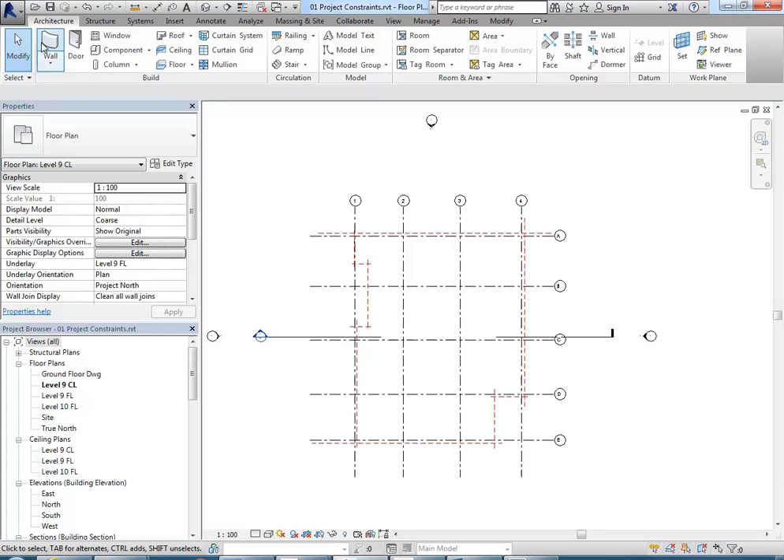So I've got my basic layout here, and now I want to start putting in some of the main elements. For Revit, these are the things that are system families. If you don't know what a system family is, don't worry too much—just think of them as walls, floors, ceilings and roofs. There are a few others, but those are the main ones. You should think of those differently to things like doors, windows, and columns, which you'll add afterwards.

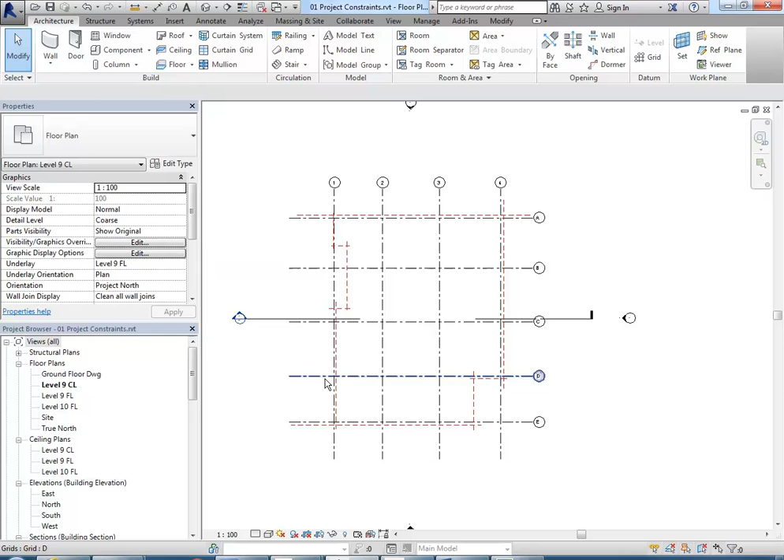This is a pretty standard process you want to go through with Revit, just establishing these main constraints before you then go ahead and add in the detail.

Notice that my copied view didn't change name. The others were linked, so they've all changed automatically. But this one hasn't changed, so I'm going to right click and go to rename to give it a new name.

I'm going to add something extra—I'm going to put a number in front, just to get you thinking about how these views get managed. So I'm going to call it 01 level 9 DWG, that'll do.

Notice how my level 9 CL has gone in before level 9 FL. That's because it just puts them in alphabetical order. There are ways of sorting your views by height, but I don't want to show you that now. A simple way of organising them by height is just to give them names that put them in that order alphabetically. So I'm going to rename this one and put 02 level 9 CL in front of it.

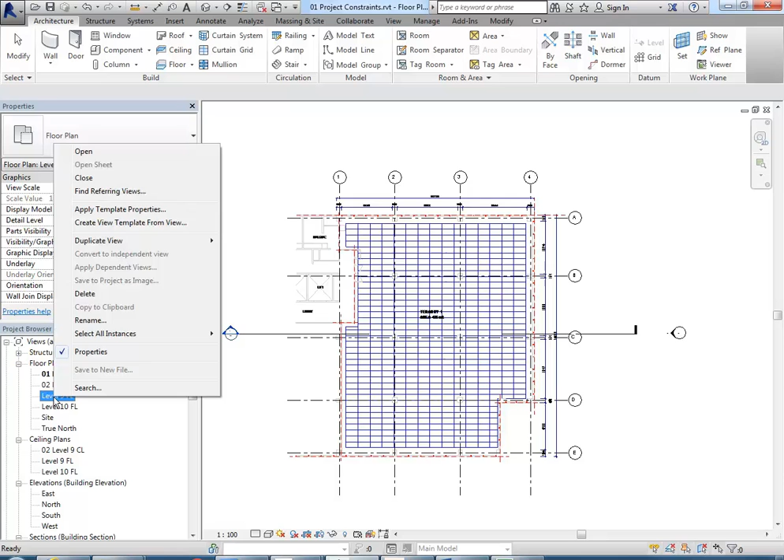So I want that to be second—yes to rename. Level 9 FL, I'm going to rename and put 01, so now yes to rename, and that goes before level 9 CL. Level 10 FL, I may as well rename at the same time and make that 03.

So you just want to keep organising these as you work through your projects, just to make things easy for yourself.

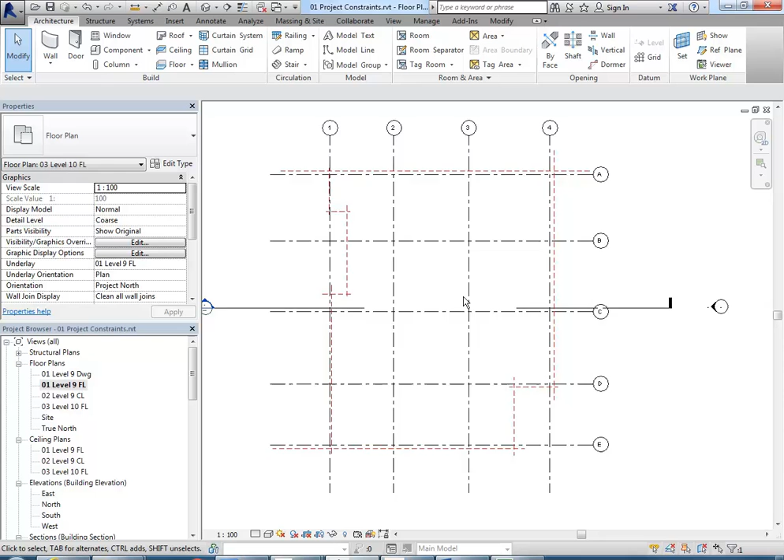So going to the one that has the drawing, let's zoom in and have a bit of a look at the wall layout that we have there. And then you can see, again, the columns.

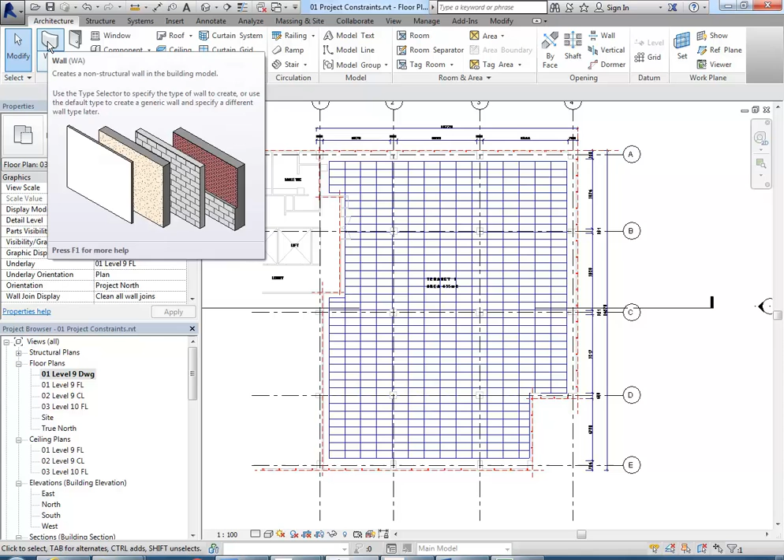Now, I was saying you should do the system family first, so that's your walls in most cases. But these are curtain walls, so the structure really is going to be defined by the columns. So I'm going to put the columns in first, and then do my walls afterwards, and then the floors after that.

So I'm going to start placing columns, but I want to measure, just using the measuring tool, and see what these are. I'd say the person who drew this wasn't being too fussy with the measurements.

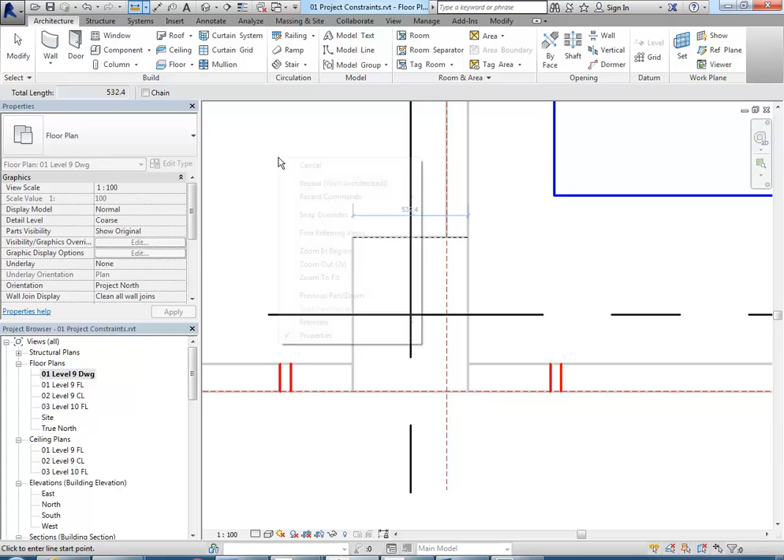723 by 532. Let's make it 730 by 530. Even that's not the greatest, but we'll live with it.

Okay, so I want to get a column in that's going to be that size. Anyone use the column tool up until now? No, you haven't. Okay, so which of those would you think you'd be using based on what we've done so far?

Oh, that's a good guess, actually. I thought you might say architectural, because for walls you've been using architectural, and for floors you've been using architectural. But you're right—for this, columns, don't use architectural. Use structural where you can, it's usually better.

Okay, now when you go to place columns, you'll see that there'll probably only be one loaded at first in your properties panel. You can see there we've got a UC, universal column, with a size we don't really need to worry about because I'm going to load in a new one.

So just like a door or window, you can go to load family on the ribbon there. And then don't go to columns—that's a common mistake people make. You need to go to structural columns. Columns won't work here, it has to be structural columns. And then concrete, and then concrete rectangular column.

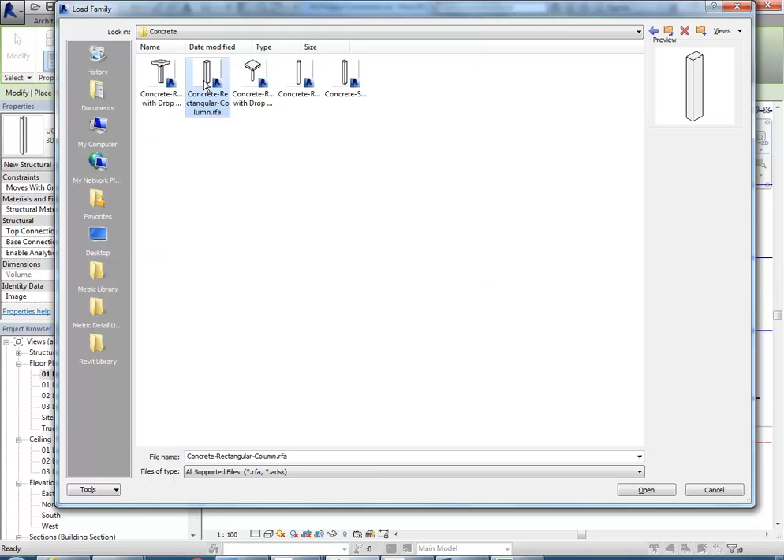Now it should come up with a list of sizes if we're lucky, otherwise it'll just load it straight in. No, it didn't give us a choice, that's okay. So you can see there, I can click on the properties panel and see a list of sizes, and none of those are right anyway, so we're going to make our own size.

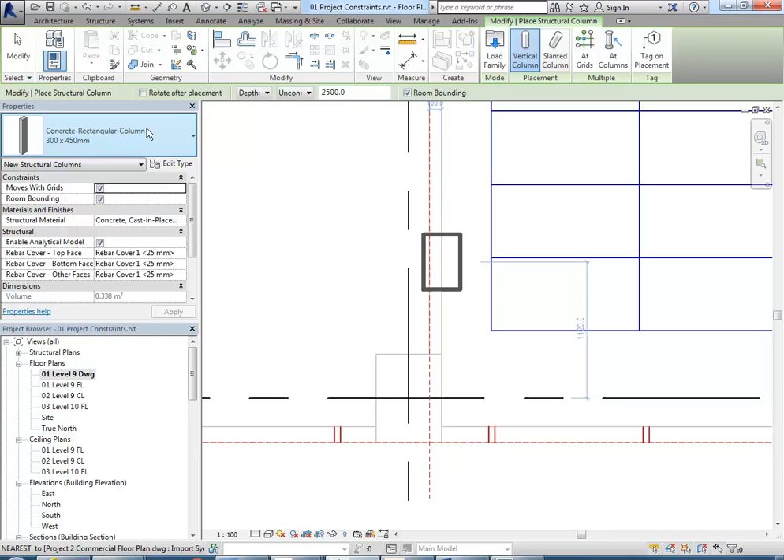So do you remember the dimension I gave you? 730 by 530, wasn't it? I think it was, but we can check that in a moment.

So I'm going to go to Edit Type, Duplicate, and type in the size we want. I'm going to put the smaller one first, 530 by 730 mm, and then change these B and H dimensions to those sizes.

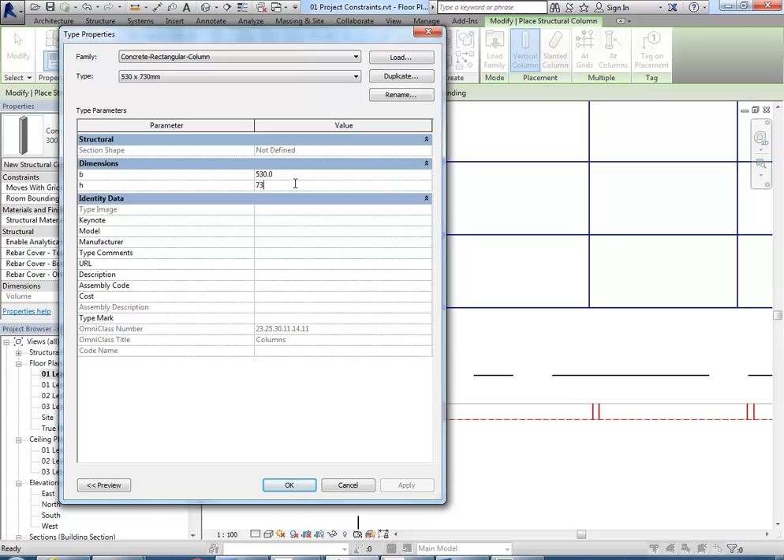And there we are. So you can see that's fairly close to the size I want, or to the size that's shown. It's exactly the size I want, but it's close to what's on the drawing too.

Okay, so now I want to make sure that I place this on the intersections of those two grid lines. But there's a common problem you'll have here when you place your first column, only for the first one - you've got to check that it's not set to depth. So up here, notice it's got the depth option chosen.

Because if you know the way engineers work, they tend to work down at first from the floor level to establish the structure that's holding up everything under your floor. Interior designers don't need to do that. So you need to go to height, usually, for your first columns, and then also change the height there to the level. So this is the height option next to height - change it to the level above, so 03 Level 10 FL. If you don't do that, you won't see your columns.

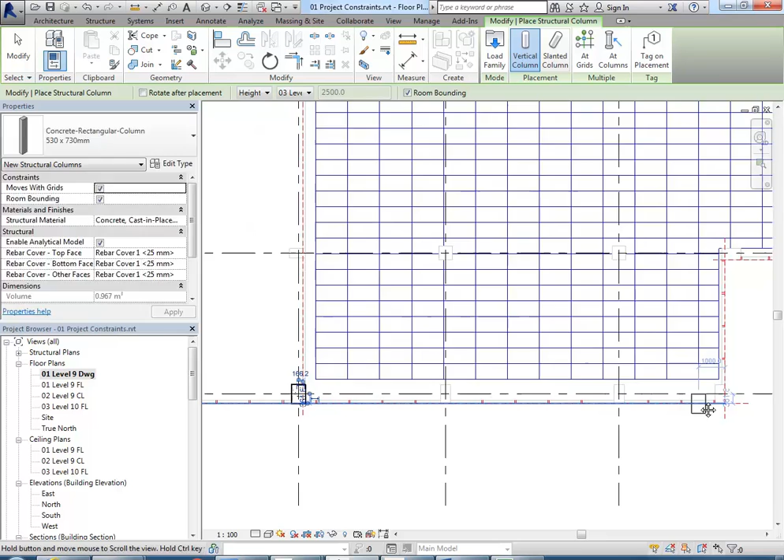So now I can just go and click onto the intersections where I have that column size. Now it may only be a few, yeah. And yes, they are. So what has gone on here? Who made this? John. Oh, okay, yeah.

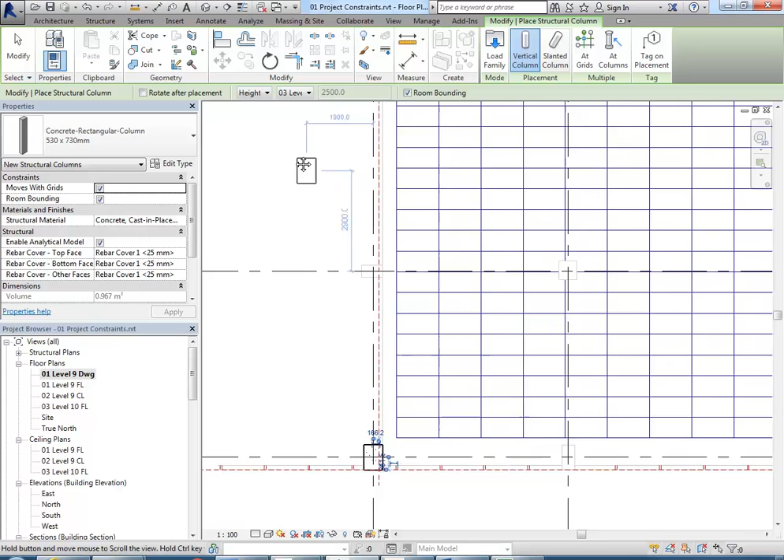Right, so yeah, it could be that these are all different, but I doubt it. Let's have a look anyway. So okay, that seems like maybe the only column that size I can see for now. So I'm going to just cancel, and then go along and measure the next one.

So 370 by, let's say 730 again, because that's what I used for the last one, so that the faces should at least line up. So yeah, 370. So okay, that's okay.

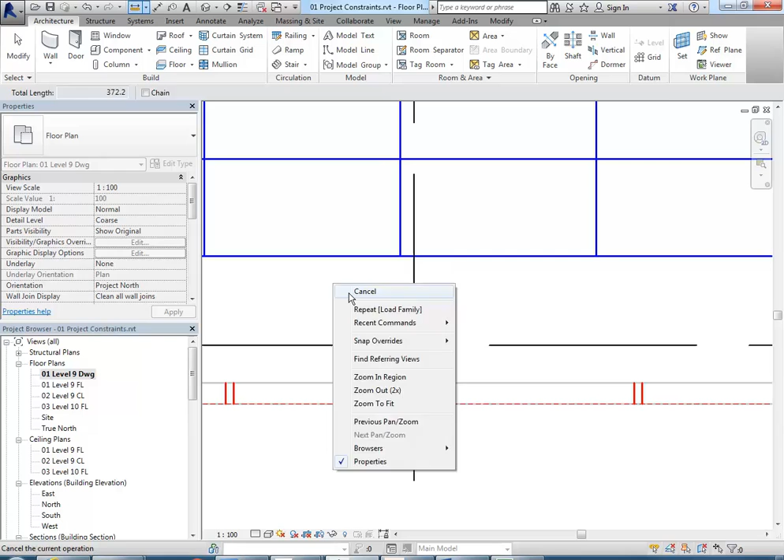I can just go to column now - it's going to remember that I use structural columns, so I can click on the column button, and edit type, duplicate, and then just make the new name 270. So if you're not used to using duplicate, this is obviously how you make your different sizes, always with duplicate. And sorry, 270 was 370, wasn't it? So edit type, and now I can just go to rename and change that.

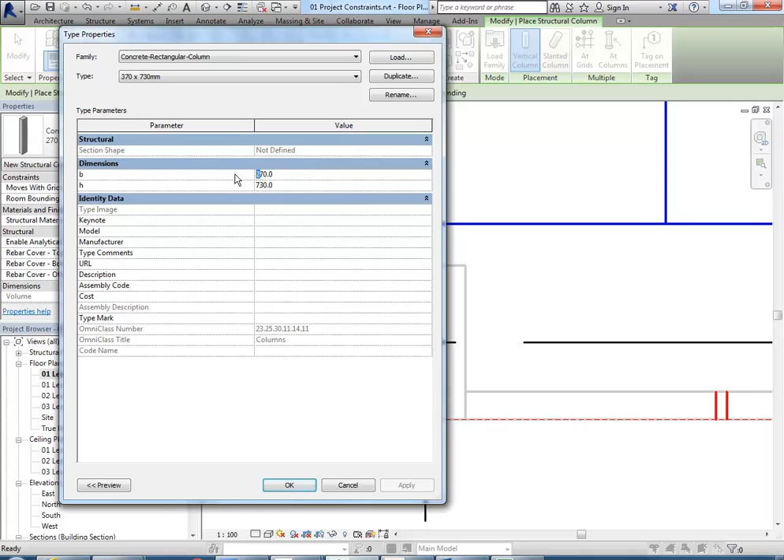So I don't need to duplicate here because I'm going to change the one I've made rather than making a new size. And so there, again, clicking on the intersection, and we should have a few more that are this size. So that looks better.

And okay, so for this one, we don't have a grid line, but there's only the one column there. So what I'm going to do is just place it on this grid line to one side of the reference plane, and then I'm going to click on the Align button. And then I can pick my reference plane and then pick the edge of my column, which will line it up exactly.

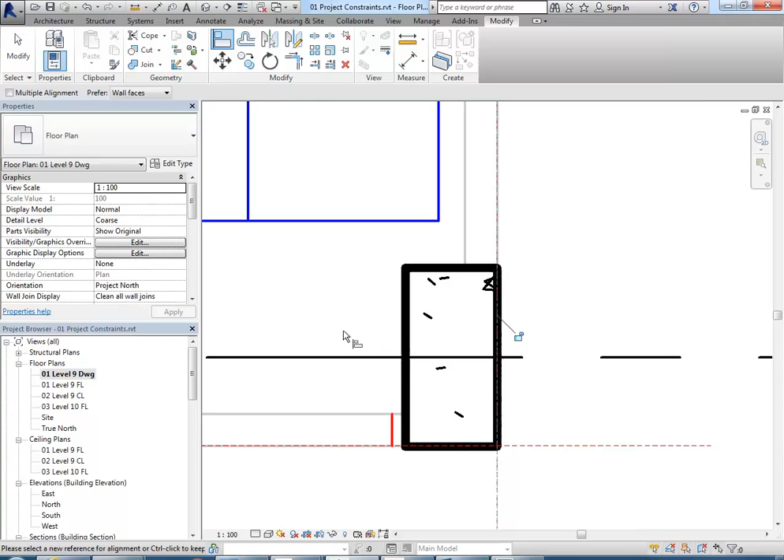Yeah, that's right, exactly. Yeah, it would be concrete. Okay, so this column here may be the same size. Let's measure it and see. God, you're kidding, it's not.

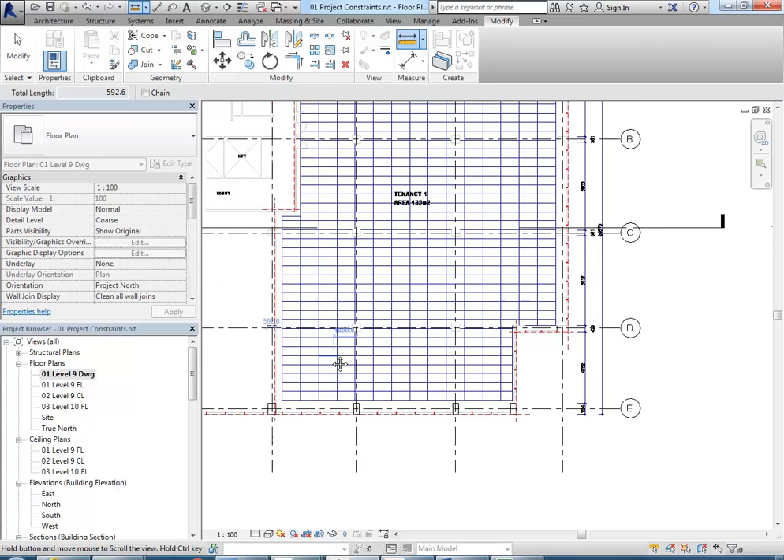Okay, so we'll make another size for that. So what is it going to be? 590 by 350, is it? Yeah, close enough, 350. Okay, so that's column, edit type, duplicate. So again, try and keep the smaller number first. Sorry, 350 wasn't it, by 590.

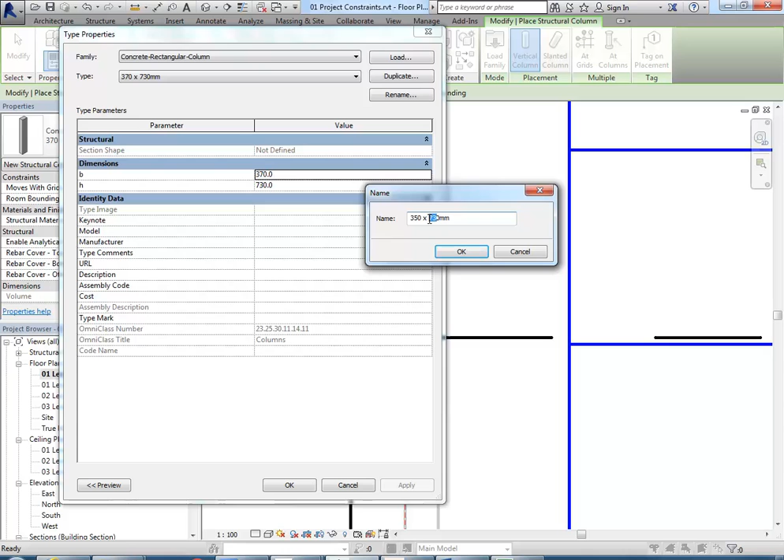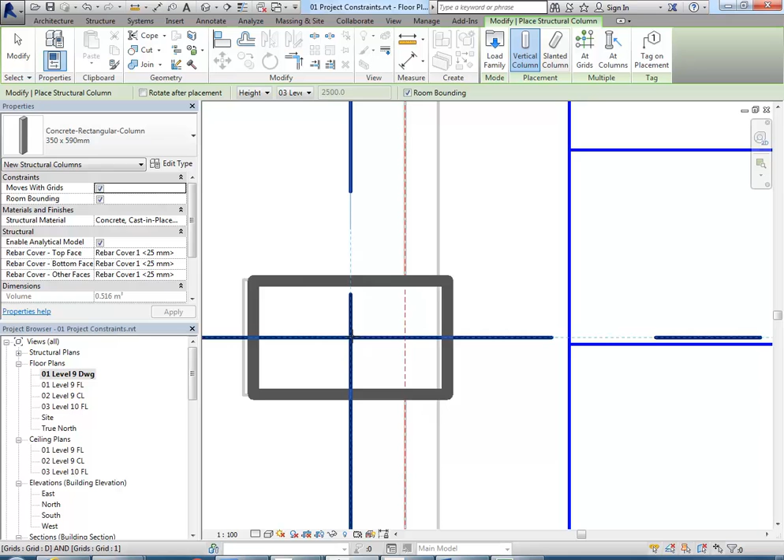Yeah, exactly, that's what I want to show you. I'm going to rotate that now as I place it, so if I just hover over the intersection there and space until it rotates to the angle I want. Now this one is not centered either, so let's just move it across.

Well, that's okay actually, because this really should be the alignment edge. But we can still line it up, so I can just use align now and choose this face, and then line the column up with it, and that's okay.

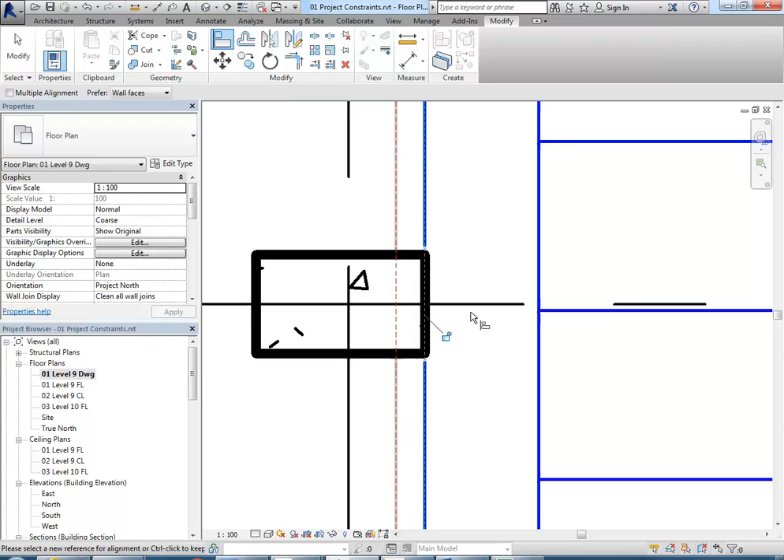Okay, so the next column, we'll assume it should be the same size. It looks like it's drawn a bit differently, but we'll just make it the same size so I can show you some other tools that you might not be using maybe as much as you should be.

So I'm going to select this column. I've just pressed escape as many times as I need to cancel everything so that I can select it. And then I'm going to use the copy tool. So now the copy works in Revit just like it does in AutoCAD.

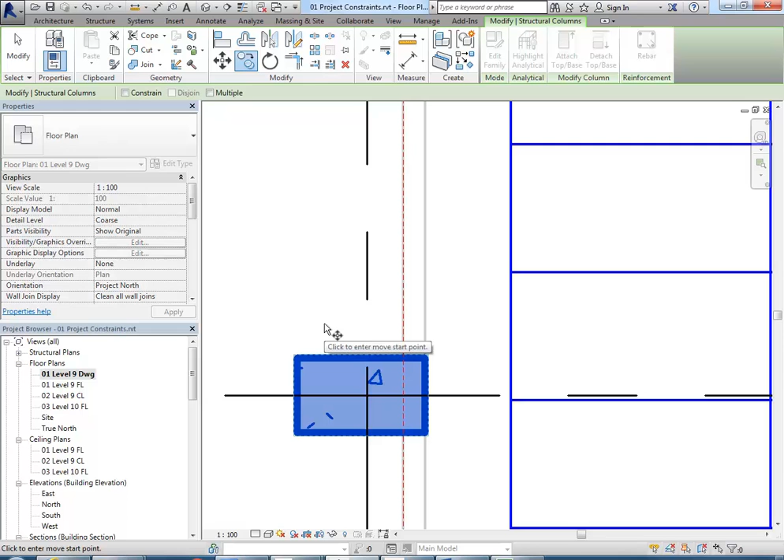You need to give a base point, so this will be the intersection between my two columns. And then my new point is going to be the intersection inside the column where I want it placed. So hopefully that can give you an idea about how you should use your base points.

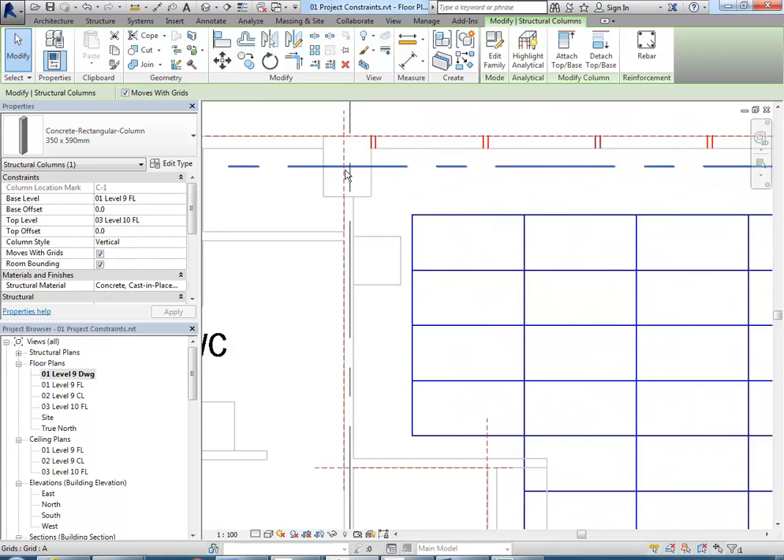And then what's the bet? That's a different size again. Again, I'd say this probably doesn't have much to do with reality, but let's just go with what it's showing. So 700 by 500, yeah. Okay.

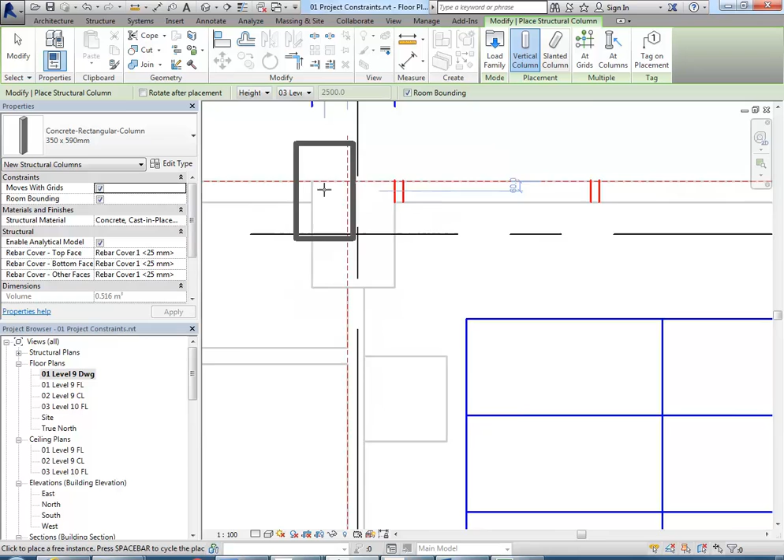Well, you could, but see, you want to be tracing this drawing, otherwise you're going to be creating a lot of work for yourself. So let's see, what was this one though? This is 530 across. Yeah. Maybe that one's close enough actually. Yep, so okay, so what we'll do is we'll go with that one.

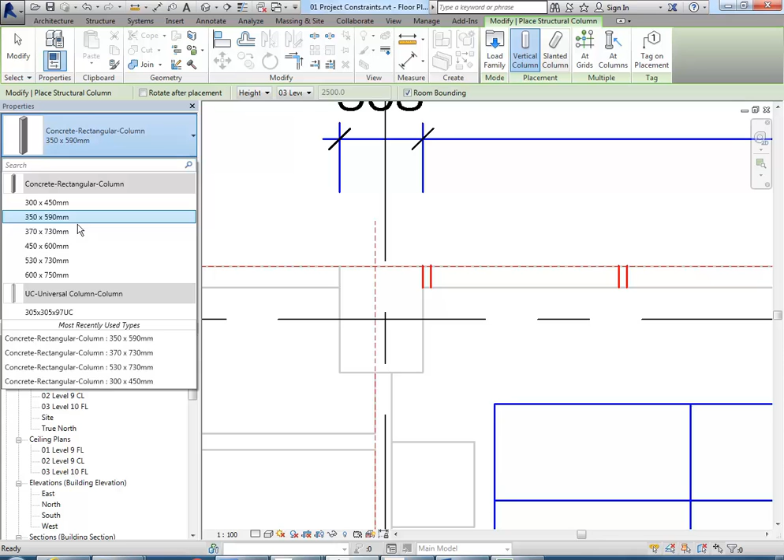Notice there in the sizes we've got the size there that I made before. So I'll start by placing it on the intersection, and notice that now the outside edge doesn't line up.

So what I might do, just to rationalise it, is align with the outside edge. So I'm going to choose that reference plane and then the edge of my column. And then I want this column grid to still be centred inside that column.

So I'm going to use move. You might be used to just dragging things around to move them, but this is much more precise. So when you need to move something precisely, make sure you know to use the move tool.

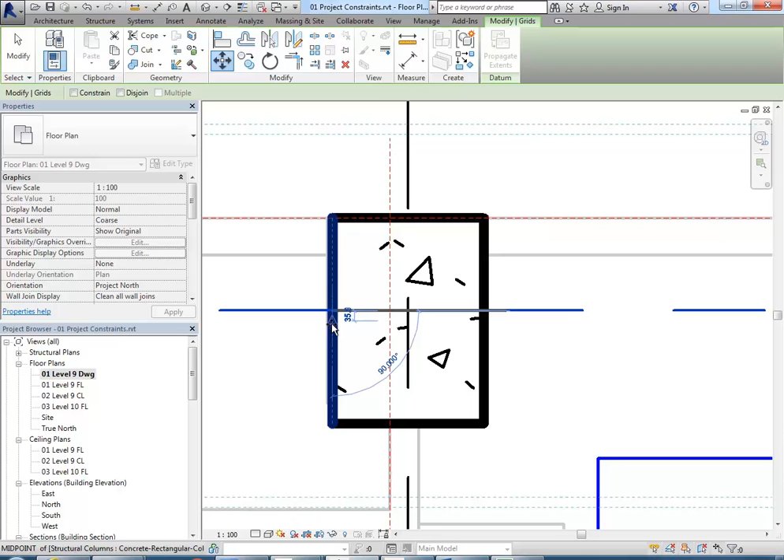Again, my base point needs to be given first, and I'm going to choose the intersection there on the edge of that column, and then I'm going to come down to the midpoint of the column. So then we've got...

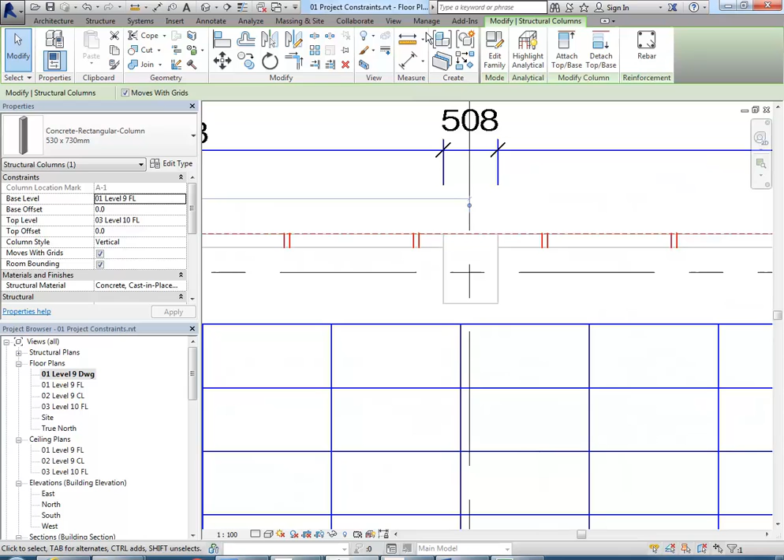A series of extra columns that should all be the same size. What's the bet they're not? They look pretty close though. 500 across, so we'll say that they're meant to be the same.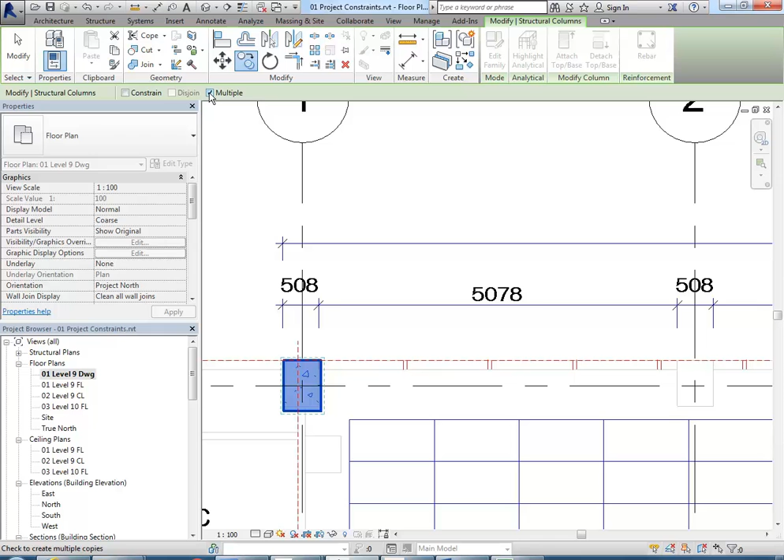Okay, so I'm going to select this column and then use copy and show you another option: multiple. So when you tick multiple, you can keep copying without starting the command again. Now this time I'll use a base point on the column grid, why not, the column grid should be centered on the column. And now I can make the second point the end of the next column grid.

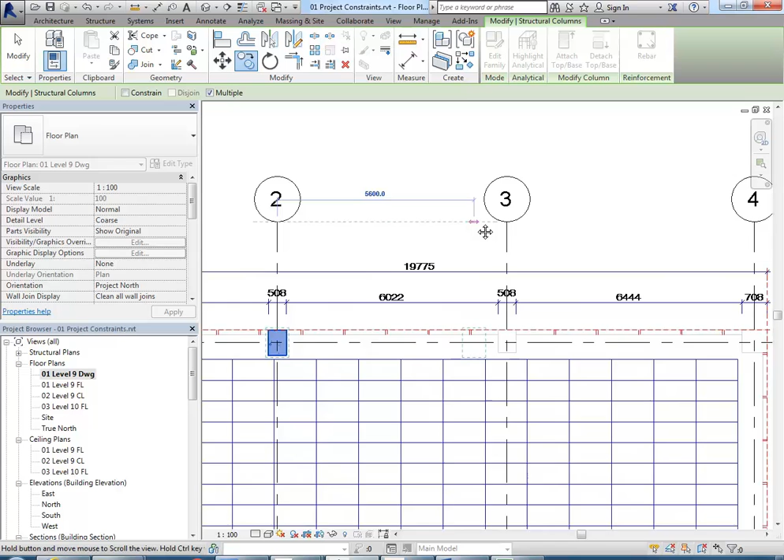So notice how the column that is being created is set out the same distance from each corner.

Now here we've got a square, so we need to make another column, and well, not quite a square. Let's say it's 730, just to keep it— oh no, god, okay, 710. No, yeah, 710 by 660. Well no, that one's, see, that's a different size, that's a different width, so we can go with the 730.

So this is the problem. When you don't set things out accurately, you're actually creating work for yourself. People think if they just rush and rush and draw like crazy and don't worry about measurements, they're making things faster. They're actually making it slower in the long run, and it's a real problem. I used to manage drafting standards in a couple of offices, and that was always a common problem with people. Mostly the architects trained in the distant past had that problem because they were never taught to be accurate. But then with computers, people generally are a little bit more accurate because they have that thought process.

Okay, so I'm going to go to the component tool, so the column tool again, and we have, let's say, edit type. Yeah, so it'd be nice if we could have it at 730, so it's the same as the other width.

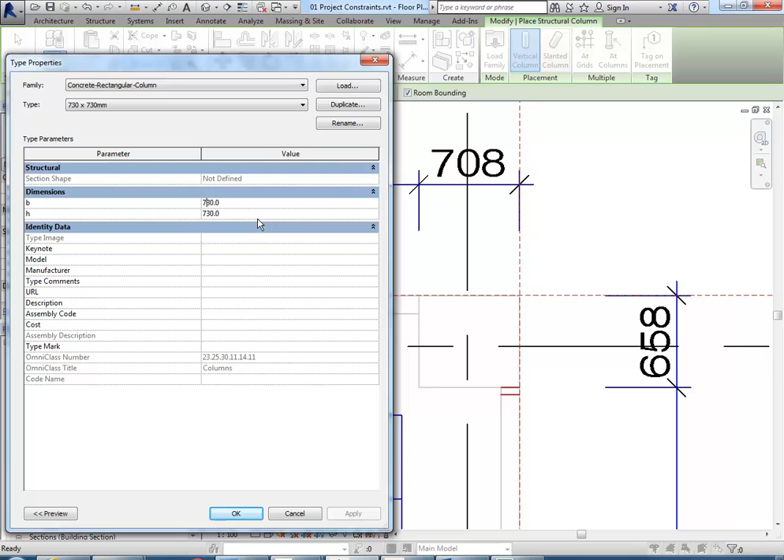And then we'll just adjust the grid again, I suppose. So, 730 by 730 is what I'm going to make it, because it really would be a square, I'd say. And then I'll just place it off to one side, and that's a common technique with Revit.

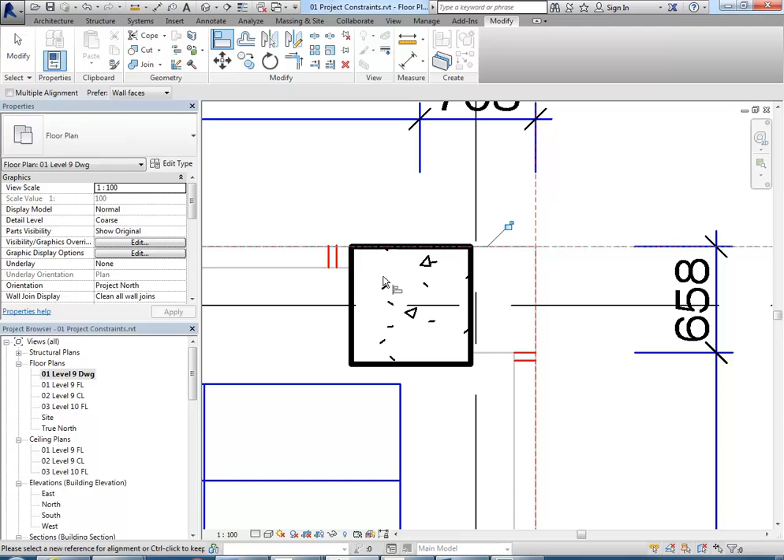So now we can then line it up afterwards, rather than trying to place it in the right spot first. So now with the Align tool, I can choose the reference plane, then the edge of the column, and then again the reference plane and the edge of the column.

Now we've got to make sure the grid is still centered. So again, repeating that technique from before, getting the intersection. And here it's going to be a bit hard to pick up because the dashed line there is slightly off the column. So a good trick there is to bring that grid down just a little bit so that the line crosses it.

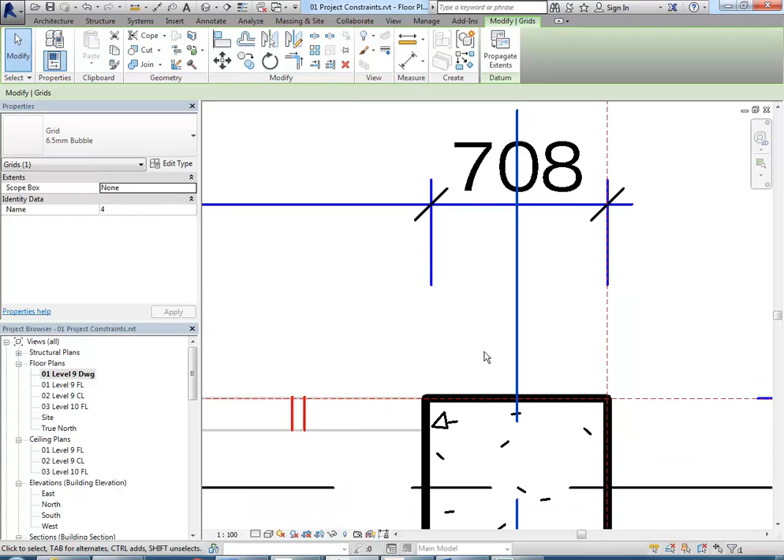And now I can go to move, making sure I get the intersection, so you've got to zoom right in there and then make sure it snaps exactly to the centre of the column.

So I know it seems fussy, but it will make sure you don't have these issues that I'm having at the moment where things don't line up and you've got all sorts of little numbers that aren't round numbers that make things difficult to work with.

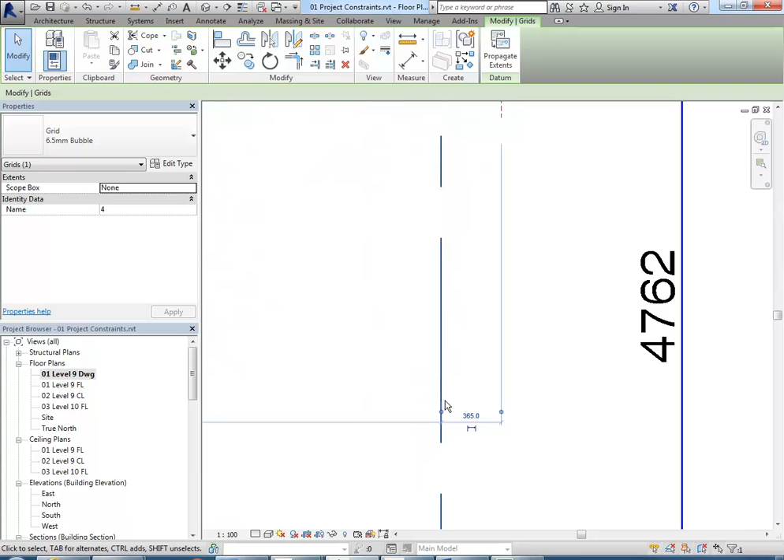Oh, and so notice when I select this column grid now, I can check the measurement there and you can see it's 365. So we know that's half of 730.

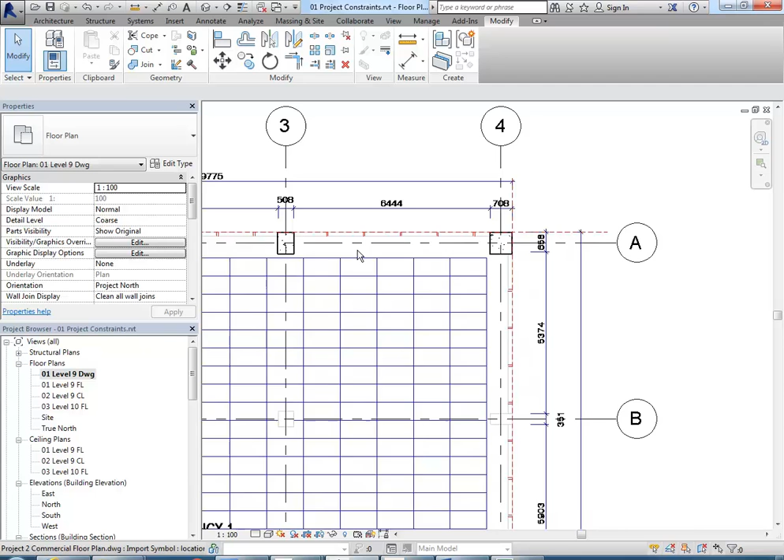Okay, so now we've got to do the same thing with this grid. In fact, no, this one's okay because this one should be centered already because I've used the same measurement there, 730 going the other way. So you can see already how having a bit of a more rational process with those measurements is making things easier.

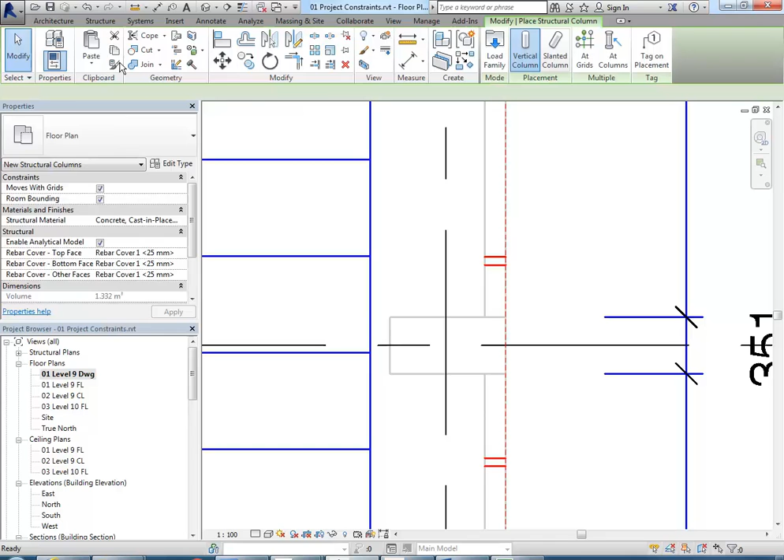So now coming along this side, we can hopefully do the rest with the same process. So 708, let's make that 730, and then this one is 350, so I think we've got a column that's that size already. So 730 by 370 is perfect there.

So now space, and it should all start coming together.

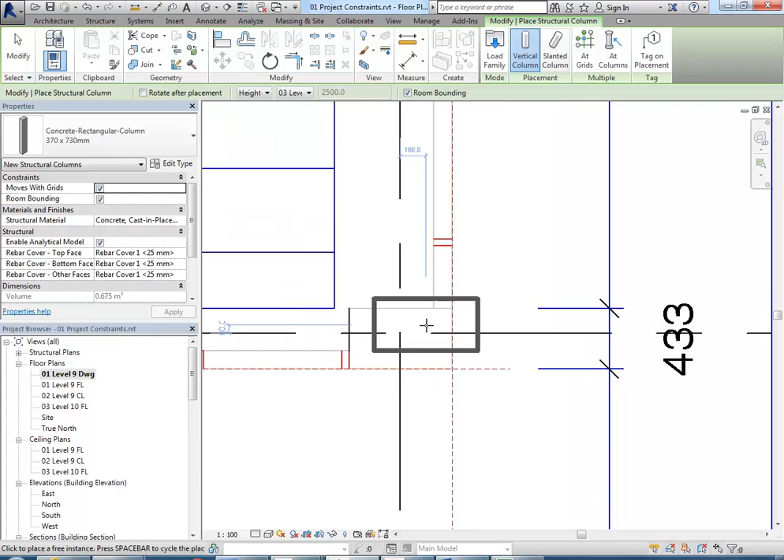Now I know sometimes people think, oh, well, I'm doing interior design, I don't need to take it to this level and be as accurate as the architects or the engineers. You actually have to be more accurate because you'll be doing finishes, and if they're not specified perfectly, they don't fit, and you have to reorder them all. You've got a major issue. So you actually have to be more accurate in most cases.

Yeah, that's right. Interior design, interior architecture are basically the same discipline.

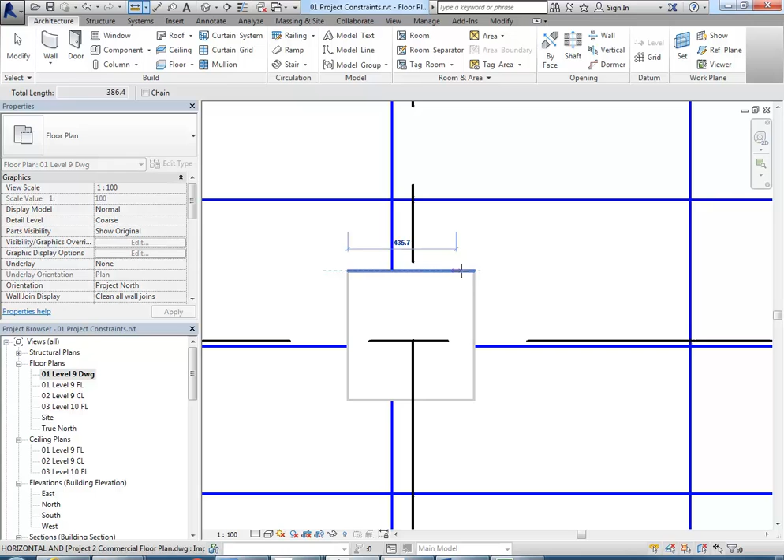Yeah. Okay, so then we've got these columns in the interior here. So again, this would be really good practice managing types and setting your sizes to do that. So this one, let's say it's 530 by 530. And so back to column.

Oops, I don't have that size, so I'm going to go and make one. Edit type, duplicate.

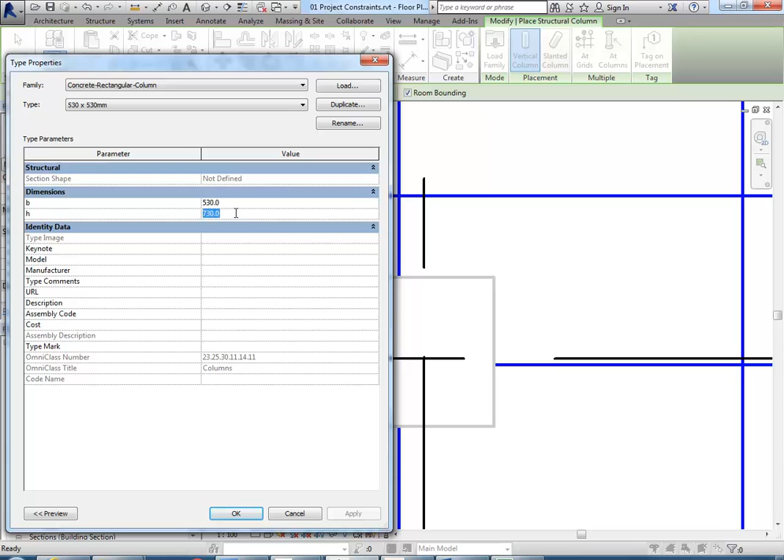And by the way, normally the column setup, if we didn't have these unusual measurements, would have taken half the time.

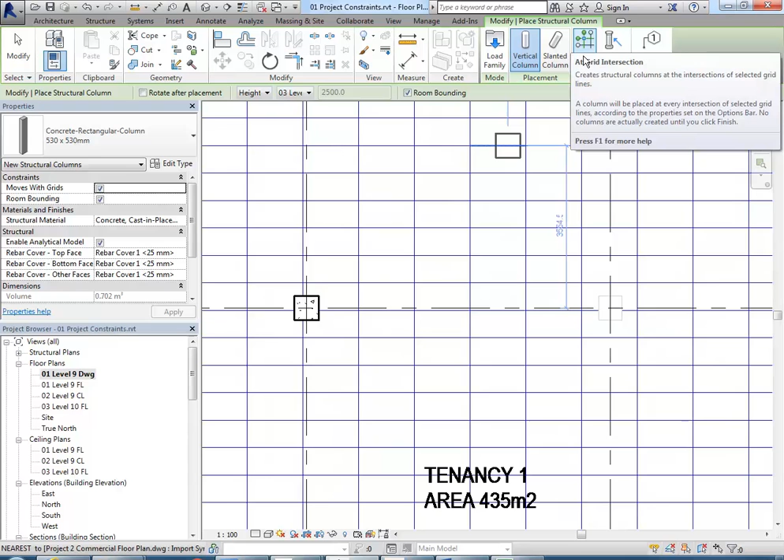So there are actually tools, I'll just show you quickly, at grids. When you have a more logical column set up, you can place them all in one go just with that tool. But again, here we don't have that, unfortunately.

And it's probably not a bad thing for you to at least once go through the process of placing each column by hand, manually, like I'm doing here.

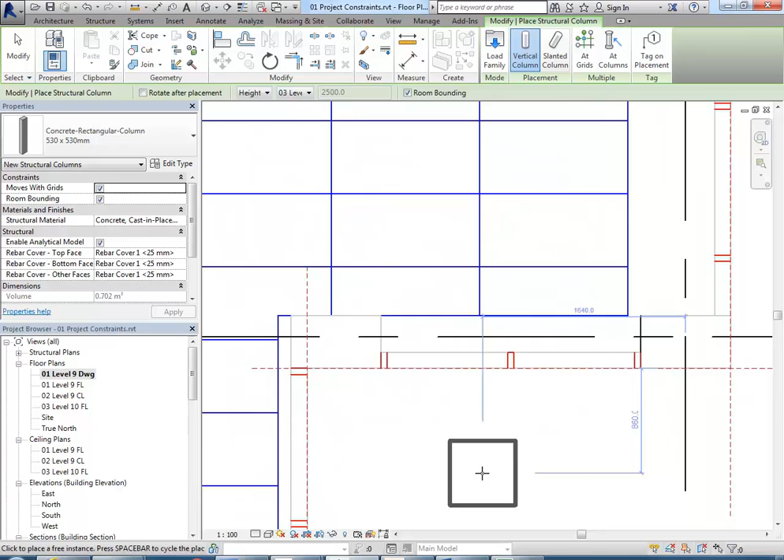So that's basically got all of them except for the last two here. So I'll measure those.

So what is it, 430 by 730. And that of course is another one we don't have.

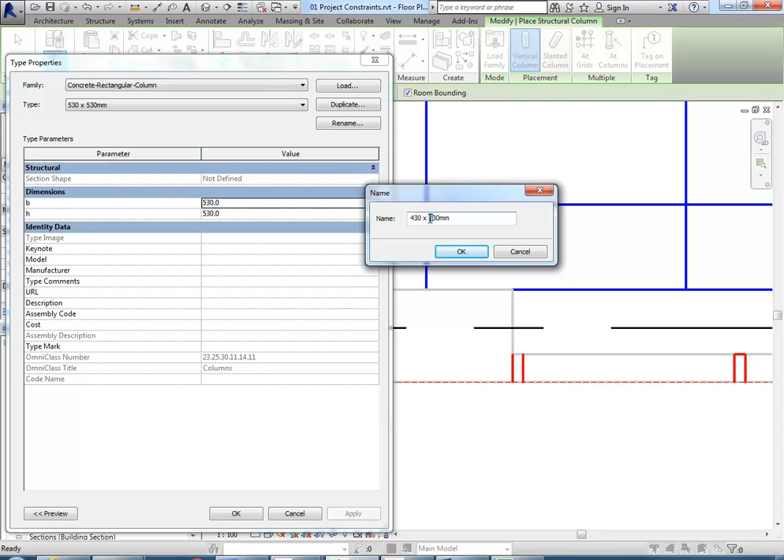So again, good practice making column sizes. And once you've done this, you really understand why you duplicate and make new sizes all the time.

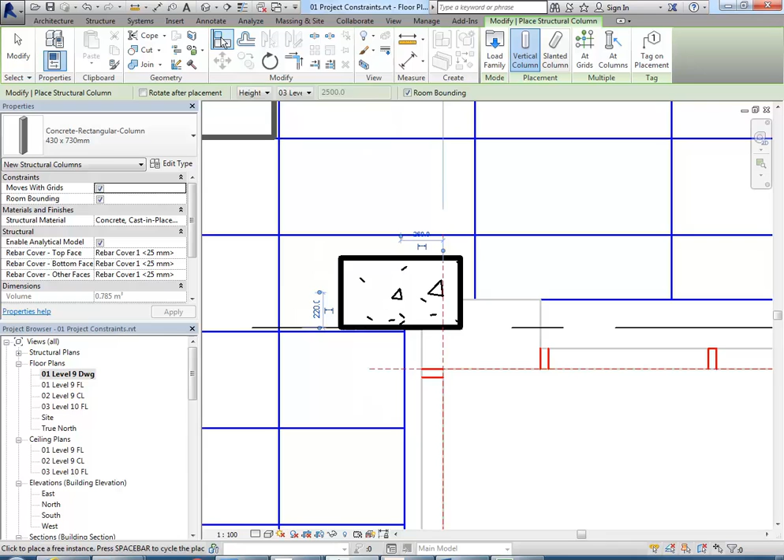And again, why you place them in the way that I'm going to again here. Sometimes it's easier placing something off to the side and then using the align tool. Well, because it's placing it on the centre, and I don't know where the centre is here, so it's easier just to place it to one side, because I want to line the outside edges up with something. And so I can use the align tool now and pick each reference plane after placing it.

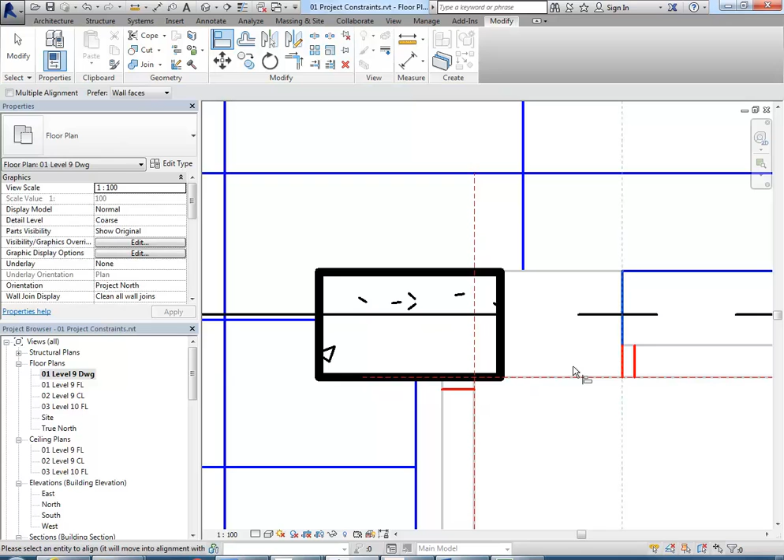In fact, this reference plane, and then this one... ah no sorry, this one needs to go to there. That's it. And then finally we just have the last column, which I'm going to assume is the same size as the previous one, so I'm just going to copy that across. That looks pretty good to me.

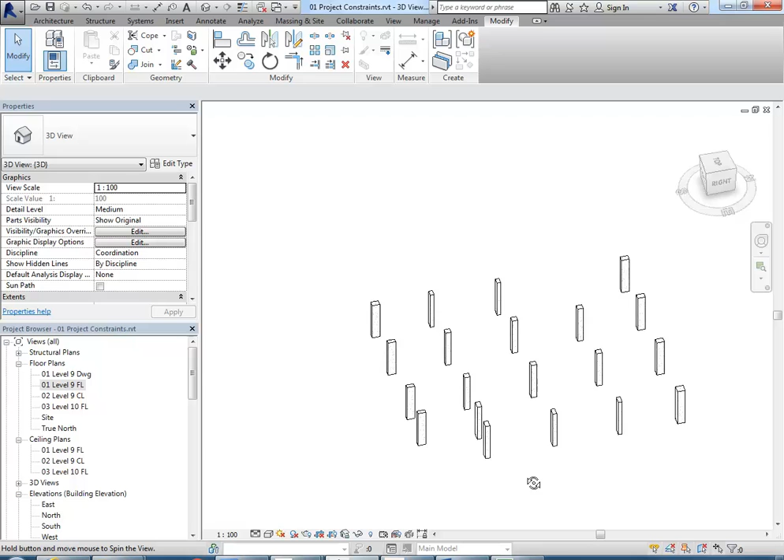Okay, looking at the floor plan, now I can see the columns clearly without that drawing in the way. Going to my 3D view, we're starting to get something approaching a building plate. Close, but we've got to do a bit more. So the next major element that's going to define the space is the floor, but I'm going to put the walls in first, just because that'll give us an edge for the floor.

So I've been telling you about this curtain wall tool, and we will make a curtain wall, but because we'll be out of time if I go through curtain walls today, we'll do curtain walls next week. So I'm just going to start with a basic wall, and this is a common process with Revit - using the wall tool, walls architectural.

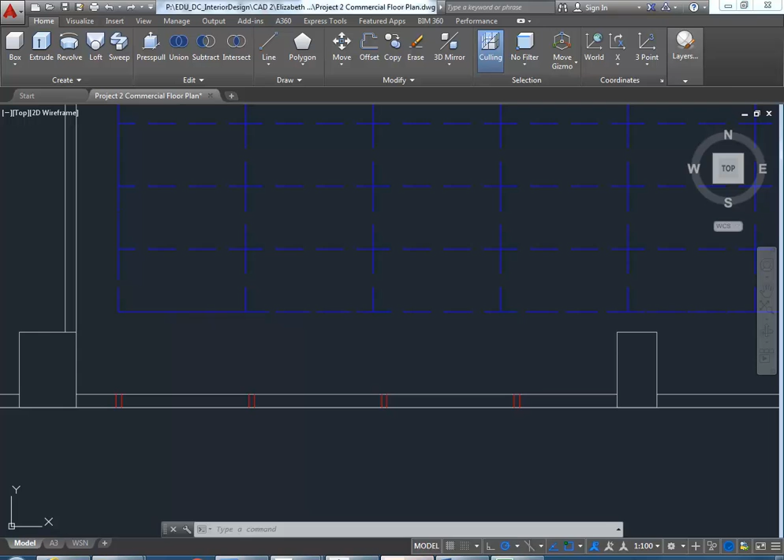I'm sure I told you this before - if you don't know what the wall is, or it's an existing wall, use the most basic wall type you can, so here either generic 100mm or generic 200mm. Looking at our AutoCAD file, you can see there's not a lot of detail showing there anyway, and the depth of that is not much above 100mm.

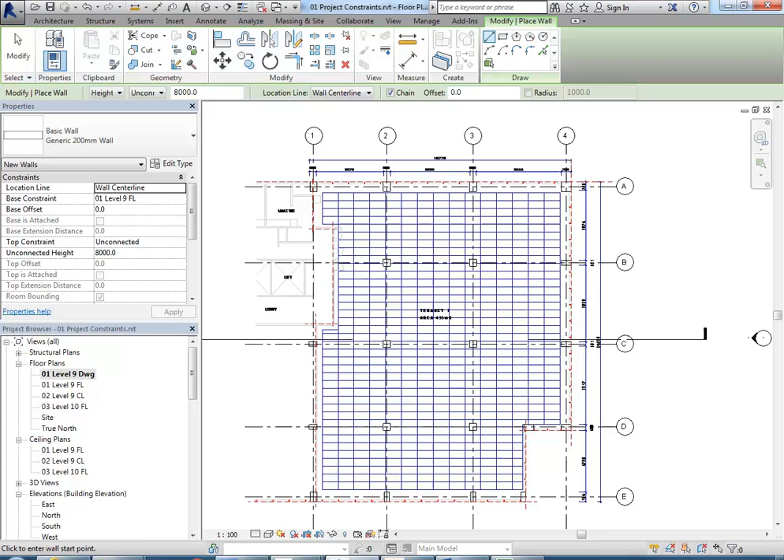Yeah, well it's probably not far off. Curtain walls would be about that, but you've got the... sorry, this one... you've got the solid part underneath, which may be a little bit wider on the outside, but we'll work that out. So I think the generic 100mm is going to work pretty well here.

And then we've defined the outside face of the building with those reference planes, so I'm going to use finish face exterior for my location line. That makes sense - if you have an interior measurement, that's what you would use, finish face interior.

Now, we've got that reference plane, and we do have the interior there as well, but I don't want to draw that. I want to draw on the reference plane so that I'm passing through the edge of the column as well. And then I'm going to set the height to 03 FL, level 10.

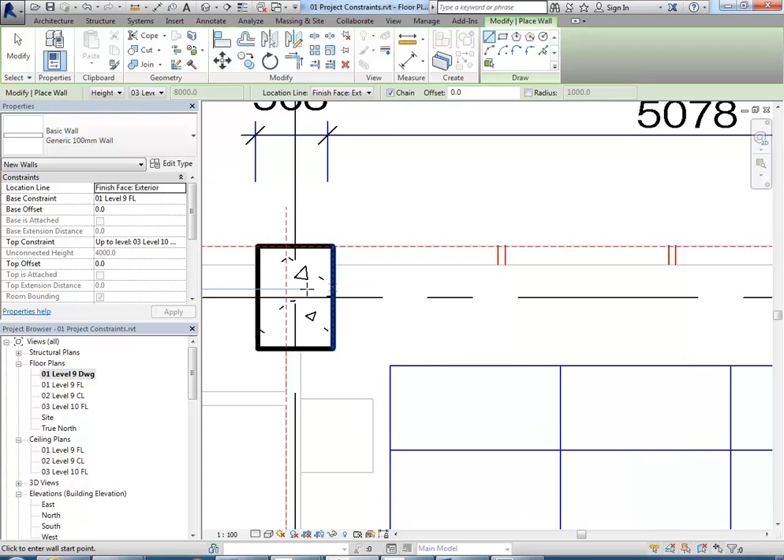And start drawing. Notice I'm starting up in the top left corner so that I can go clockwise from that point and then trace just to the corner of each column. So I'm right-clicking in between each column to cancel and then start again.

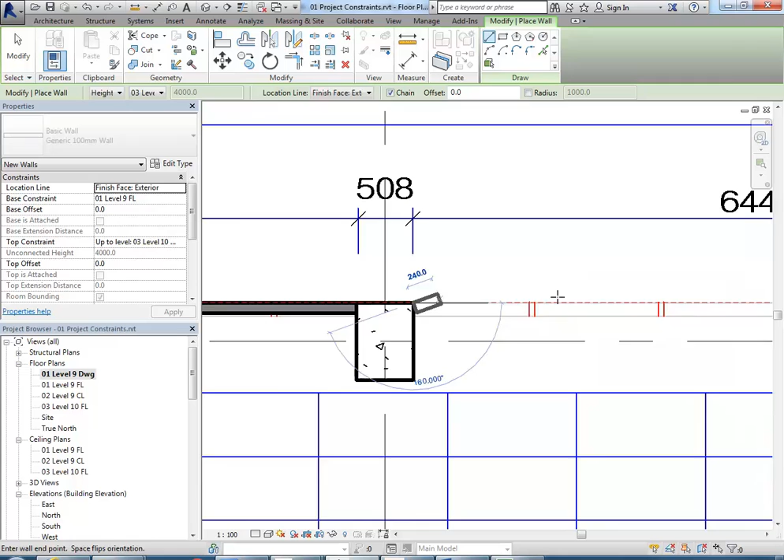Remember, curtain walls are not structural - the columns are. So we're going to have the columns exposed and the walls are just acting like infill panels in between those columns. Again, just by right-clicking and cancelling at the end of each wall, you can stop that wall. Make sure you snap to the columns, not to the drawing, and then start a new one on the next column.

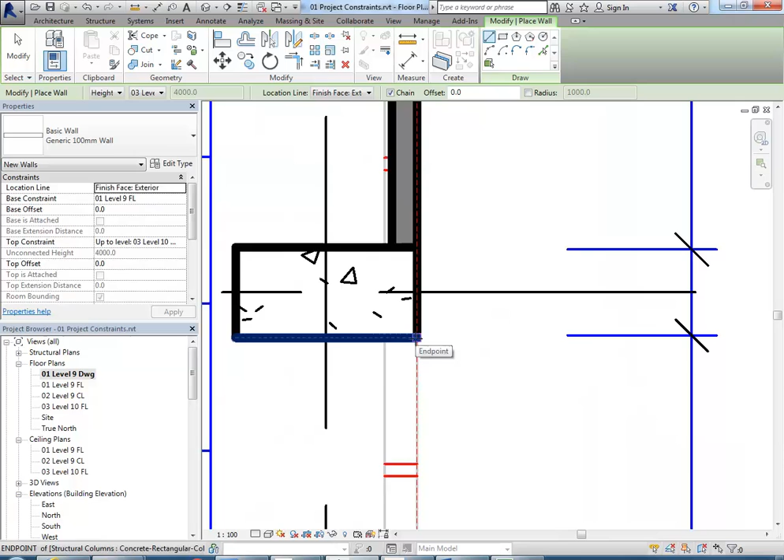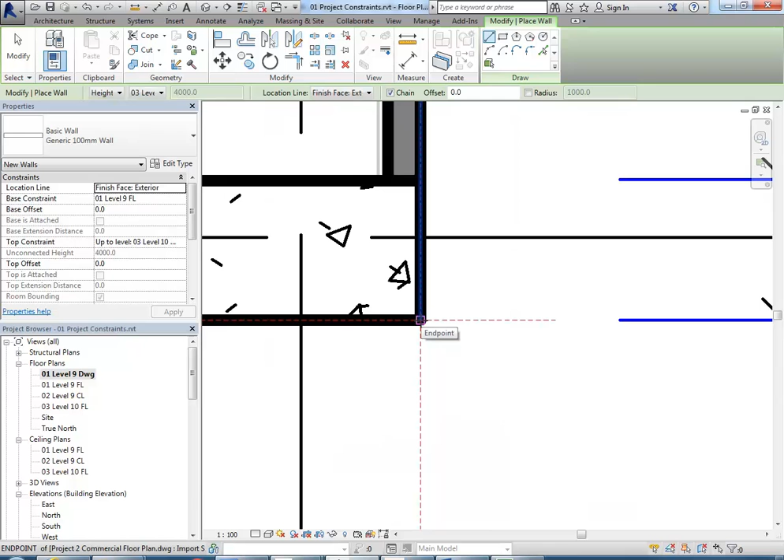Later, what we'll do is we'll make a special wall type that has the solid section of wall below your windowsill and also the windows in the wall. You don't need to put windows in here, so don't go ahead and madly put windows in, because you're just wasting time if you do that. The windows are going to go automatically in as part of the wall, and that's really the advantage of using a curtain wall.

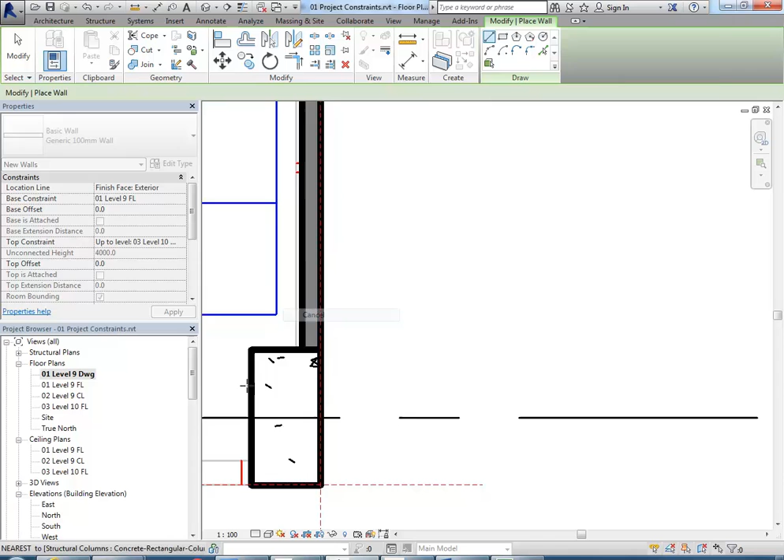Okay, so again, notice how as I draw these walls, I'm highlighting the column. It's an easy mistake to make if you snap to the drawing. You'll see here, there we are - see how it's highlighting something, but it's not necessarily the edge of the column. So there, notice how that's the column. Just watch out for that - it's an easy thing to have it snap to the wrong thing.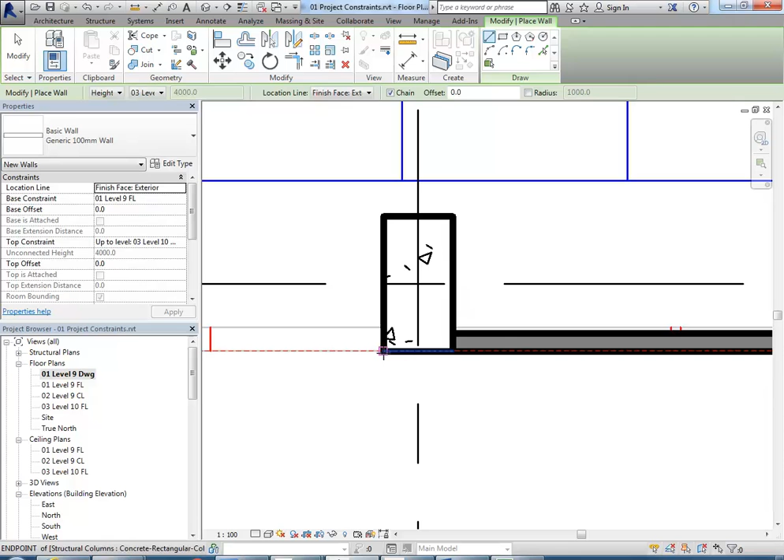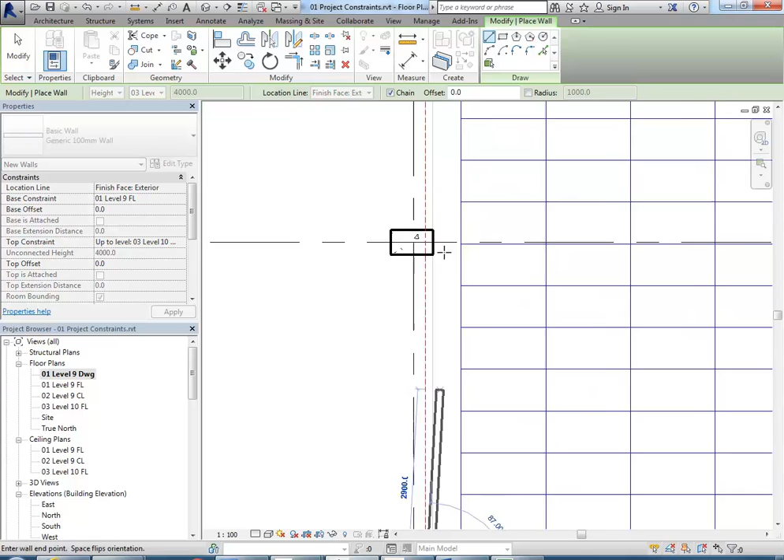And here that wall just continues along somewhere, so I'll just do that to a random point. And then this wall, even though it's an interior wall, I can use the same wall type. We might even keep it as that.

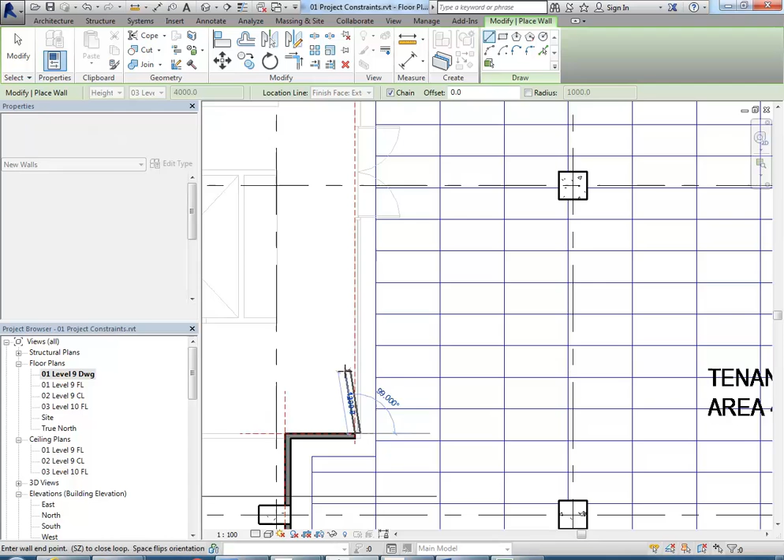Okay, so this one here again will be a curtain wall. Even though it's an interior wall, you can use curtain walls for those shop front type walls, if you're going to keep it as that sort of glazed wall.

But for now, just do it all. It's the same wall type. Just trying to define the space. We'll put some more walls in for the core afterwards as well.

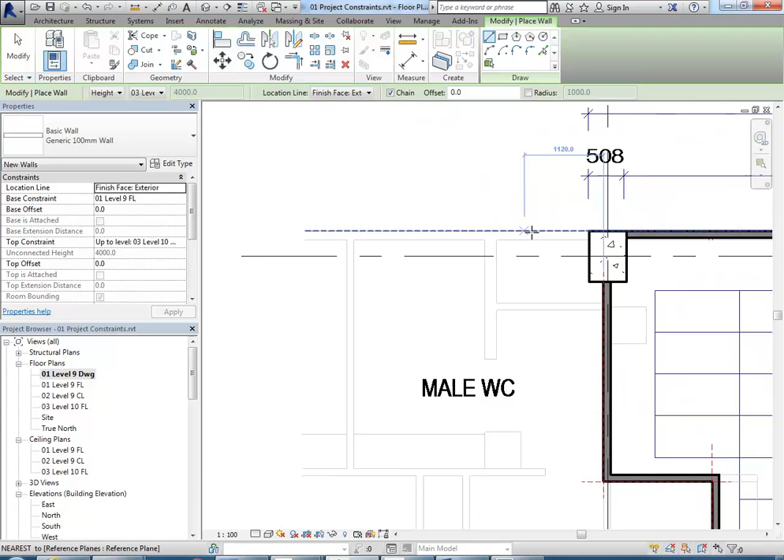But again, really here, I'm just trying to define the main space. And then in this location here on the top corner of the column there, if I start from, well, I do need to start from there.

Now if I go left, notice that the wall's going onto the wrong side. So do you remember what you have to do to make it go the other way? Well, you'd think so, right? Because if you're thinking of location line like justification, left or right, that's what you would do.

But it's actually not the right thing here, because that's setting the exterior side of the wall. Now this is the exterior side, so I want that to be set that way. What I want is the wall to go onto the other side of this line.

Space. So space flips it. So your thought process should be, what is the inside, what's the outside of my wall? And start with that, and then decide on your location line based on whether you're drawing that part of your wall in your building, whether it's the external face of the wall or the interior face.

If it's an interior wall, it doesn't matter. It can be either way. So there's no external face with interior partitions, for example.

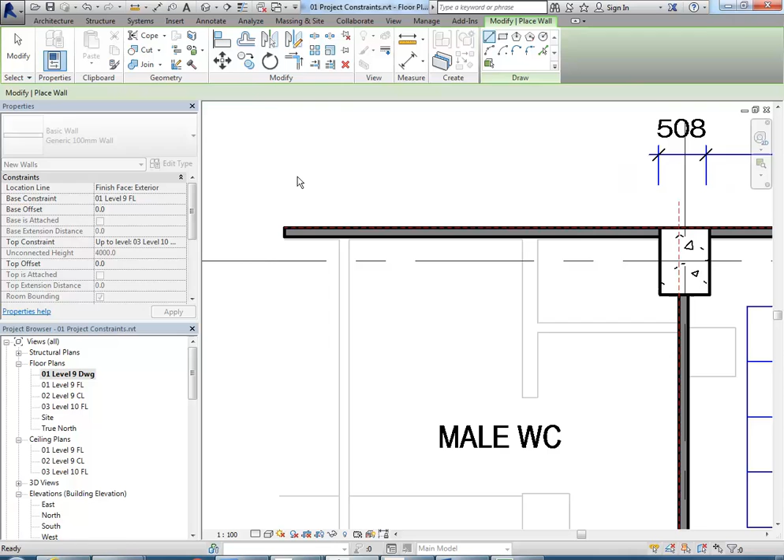Okay, so start with that, and then if it doesn't go onto the side you want, space to flip. Yep. And there we go. So I can draw that last wall, and that's really important.

So if I select this wall, notice how it's got the grip there on the corner. Same with this one. So then I'm going to show you in the 3D view, starting to have a defined area.

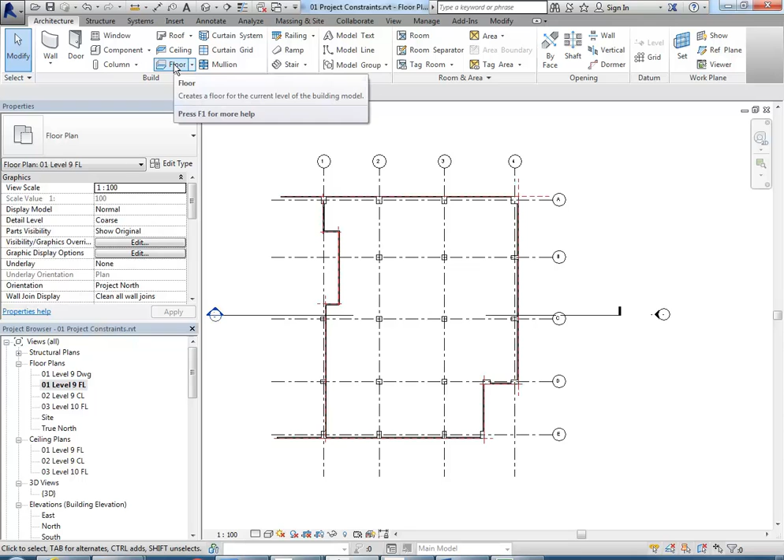So a very last thing I'll just do there quickly is the floor. And so for this, I'm actually going to go to the floor plan without my drawing, and just click on the floor tool. If you want to, you can click on the arrow there and choose floor architectural, but the floor button will do the same thing.

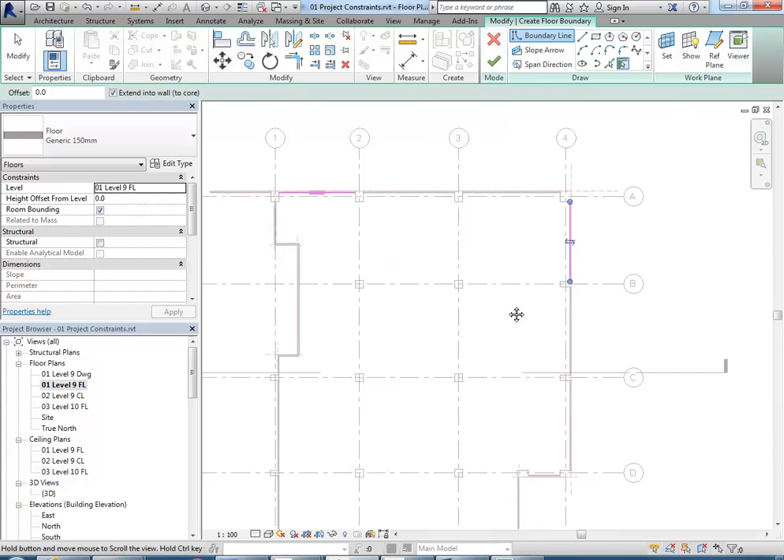And here I'm going to leave it on pick walls. I'm just going to choose one of these walls, on each side. So I don't need to pick each of these walls, just one. Notice I'm picking on the inside edge. And again, just one on each side.

So here, the side is going to be off to one side. We actually want to have some floor outside of the space as well, because we want to show the corridor and some other things. So instead of pick walls, there I'm going to use the line tool and draw a line down along that edge. Just a straight line.

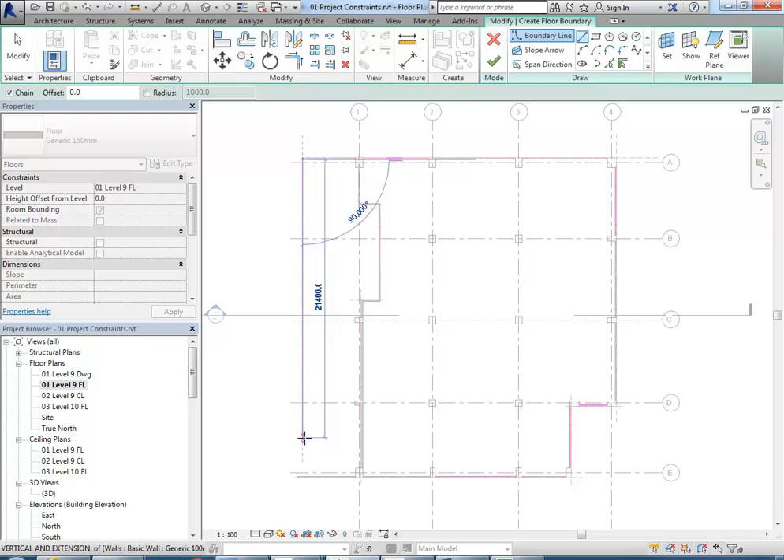So again, your thought process there should be that you just need one edge on each side, and then you can use trim to join those together. So remember, trim to corner works just like fillet in AutoCAD, fillet 0. So I can choose now each of these lines in pairs to join them. Doesn't matter if they go through a column.

Okay, so now when I join these last two together, I've got a closed shape. Right, so can you see why it would cause a problem if I'd chosen each of those walls going along? It would have been more work to join them together than just having one on each side.

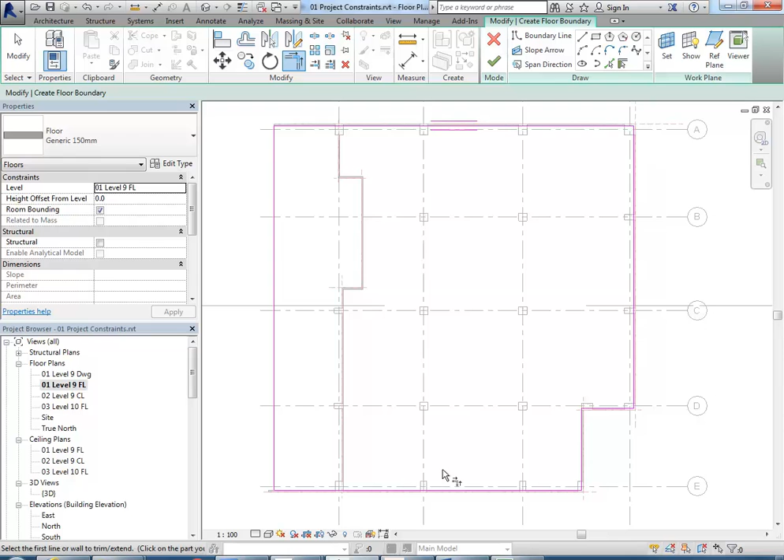Okay, so again, now tick finish. I've got my floor plate. 3D view. And you can even leave it like that for now.

Before long, you'd probably put a floor in for the next level. But just to start working and putting some of your design ideas in there, that would be more than enough to get you started.

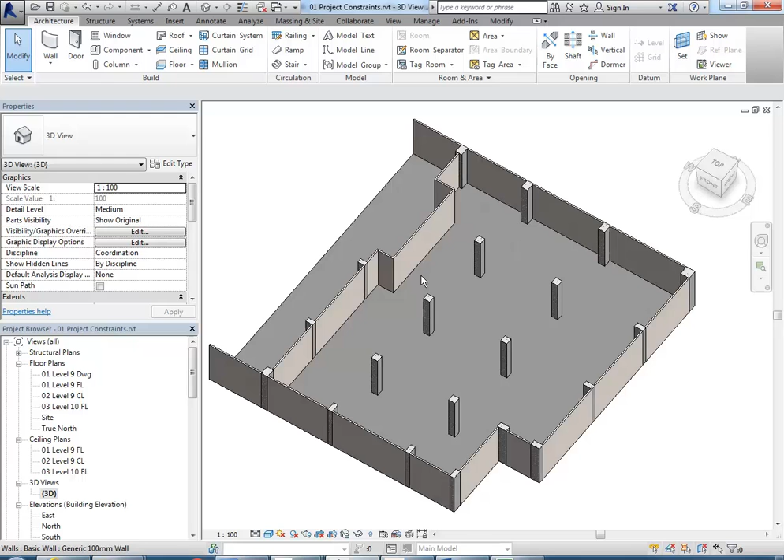Yeah, so that'd be good. If you can get that done today, that'd be great. And then next week we'll look at putting the curtain walls in, and probably setting up some of the core and some more detailed elements as well.